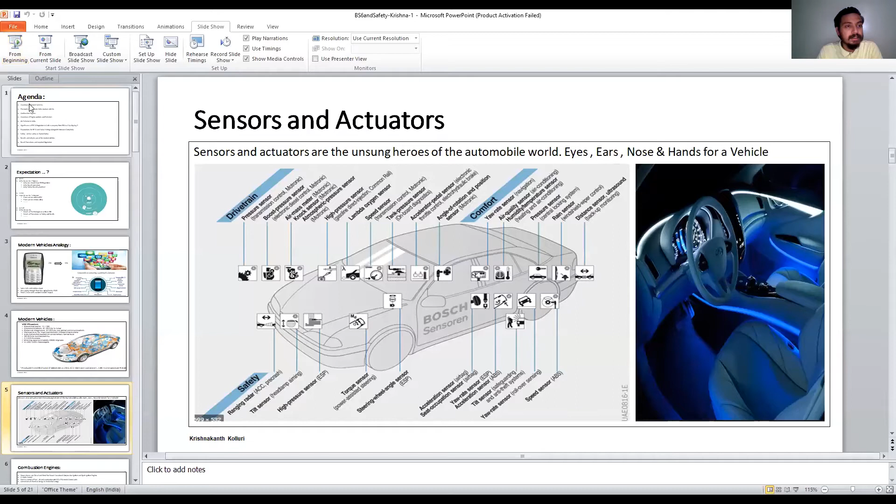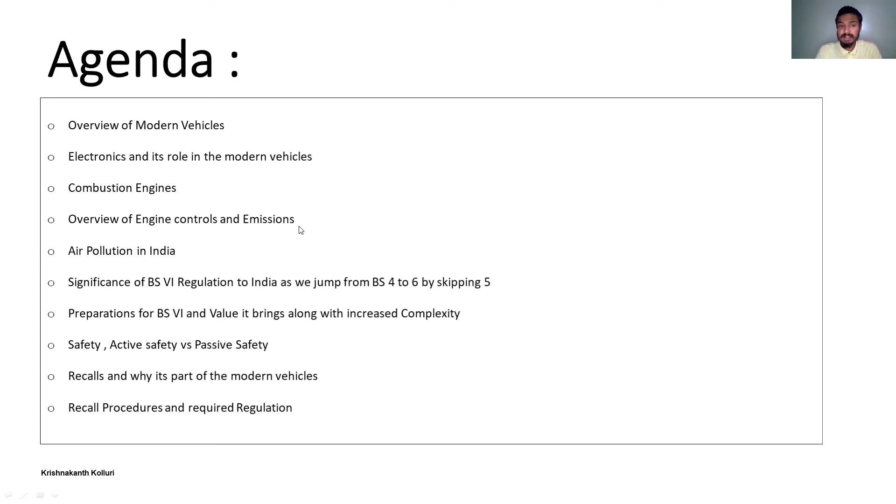Coming onwards to the overview of engine controls and emissions, we'll talk about air pollution in India - what is the stage and level of air pollution happening in India. Moving onwards, we will talk about the significance of BS6 regulations in India, as we jump from BS4 to BS6 by skipping BS5, along with the preparations needed and the increased complexity it brings. Moving onwards, safety - active safety and passive safety, the types of safety. Lastly, we'll be talking about recalls and why they are important for modern vehicles, along with procedures, technical terms, and some regulations related to it.

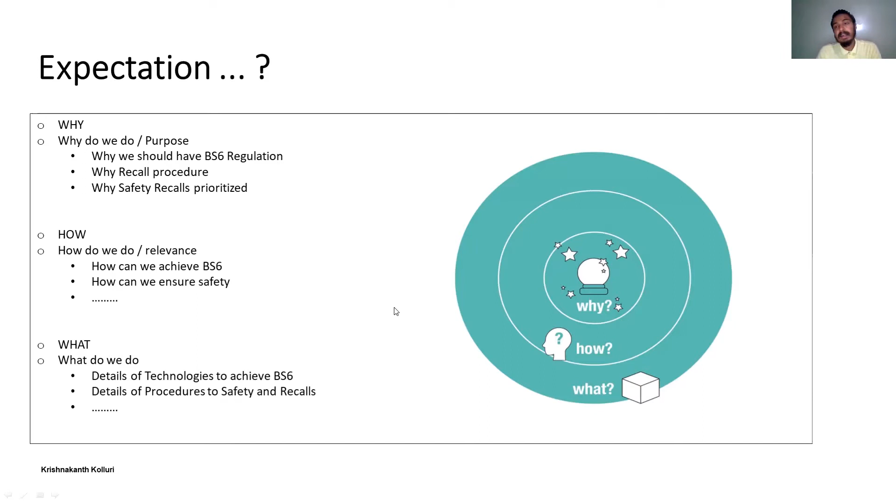So what should be your expectations from this presentation? The first thing we would learn is what BS6 regulations are, how recall procedures are done, and what safety recalls are prioritized over every component. Then we will talk about how we can achieve BS6 regulations and the things associated with it, and how we can ensure safety in BS6. Lastly, we will discuss how these technologies are affecting things and how BS6 can achieve what we want, along with details of the procedures of safety and recalls.

But it is not the same in the case of vehicle modifications, as it includes a lot of parts and a number of hardware upgrades, and it is not easy to have a vehicle recall. It's a very complex procedure.

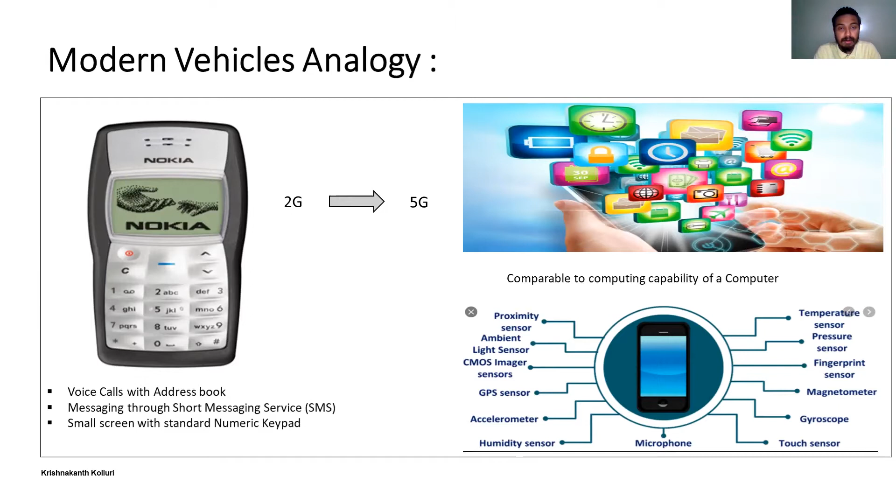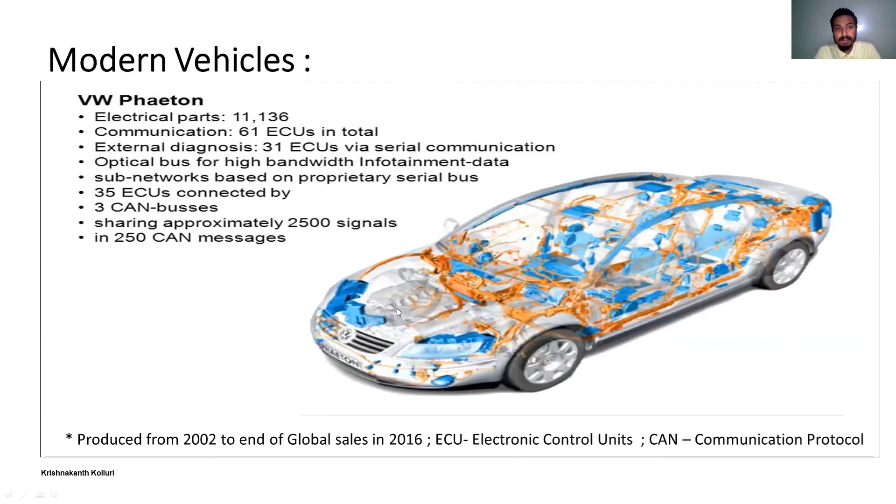So here you can see the detailed procedure of it, how each and every component is valuable, and how the recall procedure is such a complex process.

So now moving onward to the sensors and actuators. These are nothing but indicators, and they are a kind of unsung heroes of the modern electronic automobile world. They work as the eyes, ears, nose, and hands for a vehicle. Each and every part has sensors and actuators associated with it, indicating different types of functions and indications to the driver.

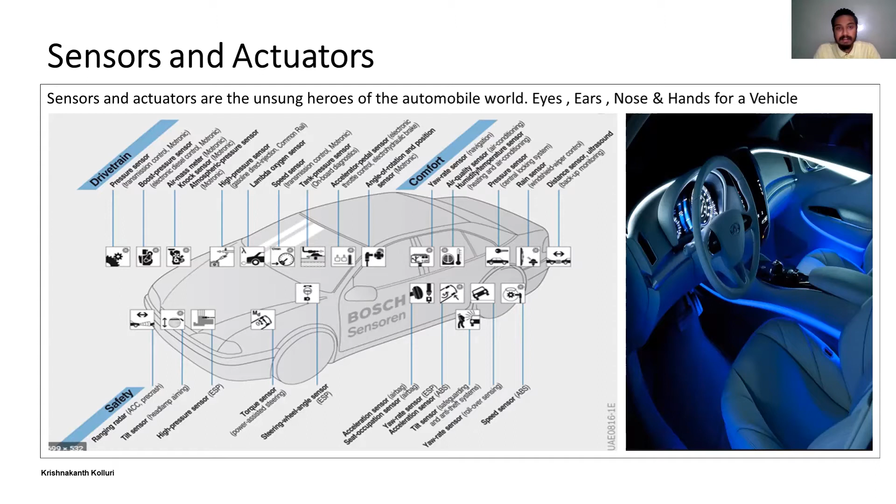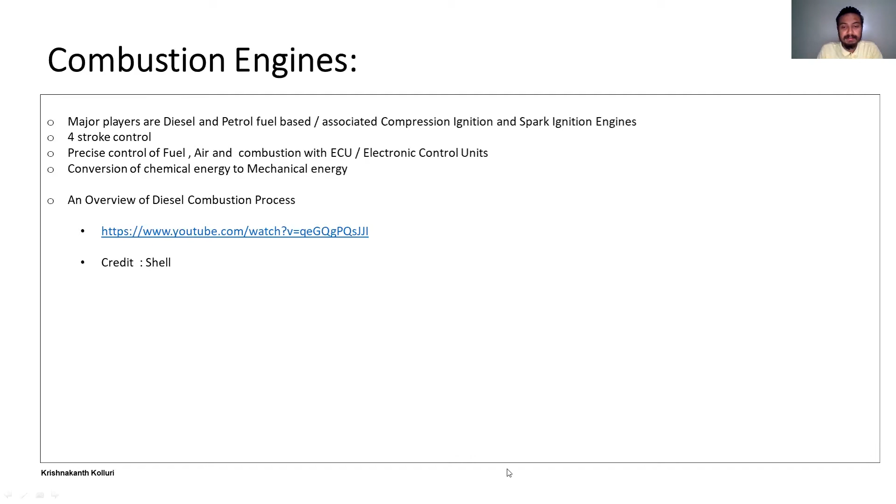Before I jump into the emissions part, I just wanted to look at a very small 2-minute clip explaining how combustion happens in a diesel engine.

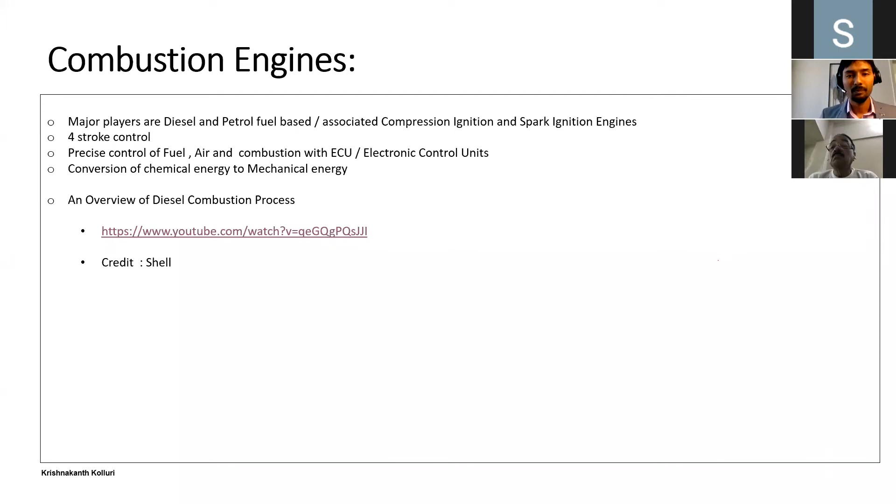I hope everybody can listen. I have tested it, but please let me know. Otherwise, there are subtitles for this.

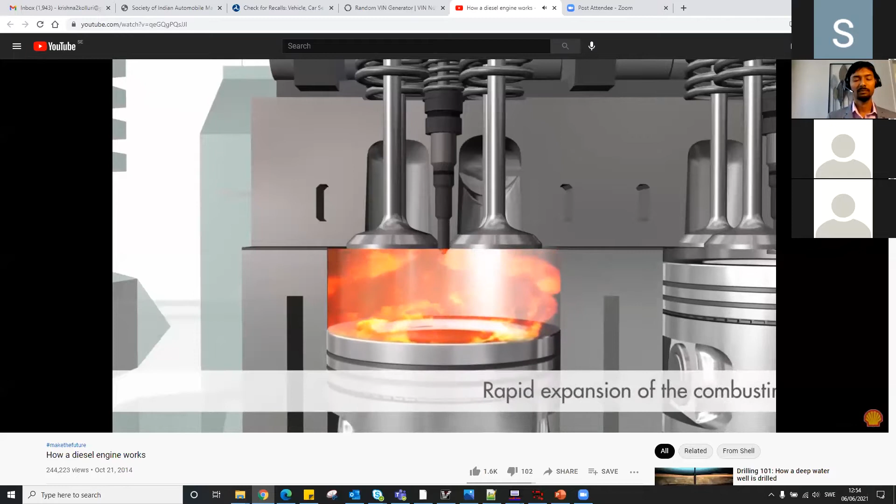Krishna, we are not able to listen to the audio. You are probably not able to listen. Okay, you can explain while the video is going, I think. There is a small issue. Are you able to hear now?

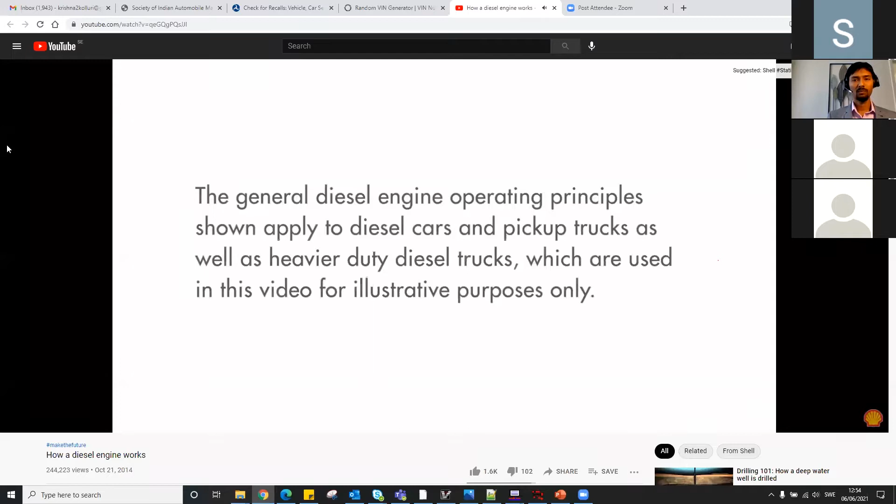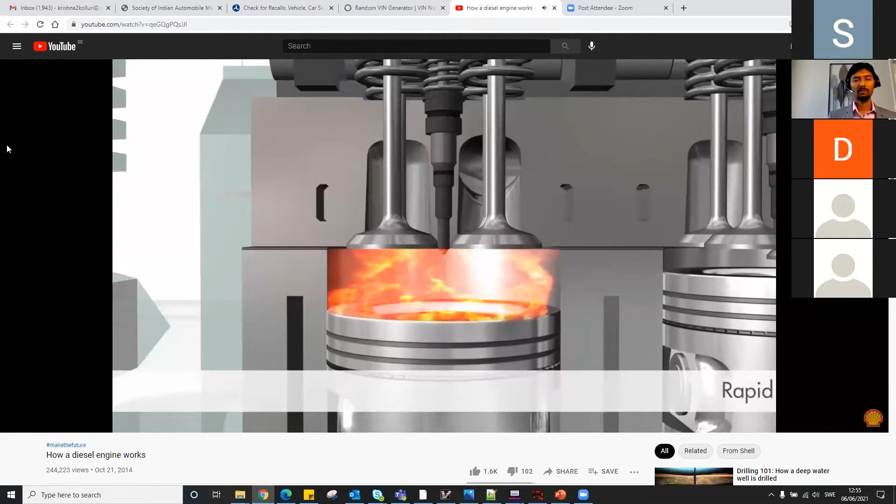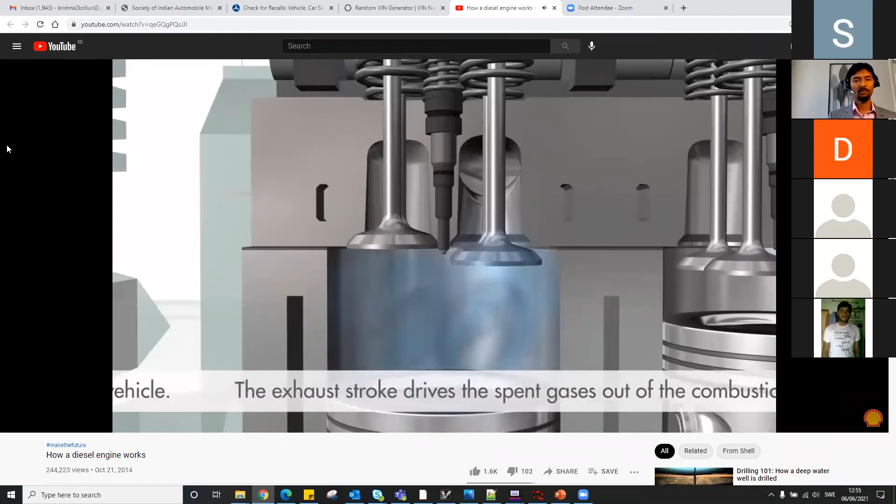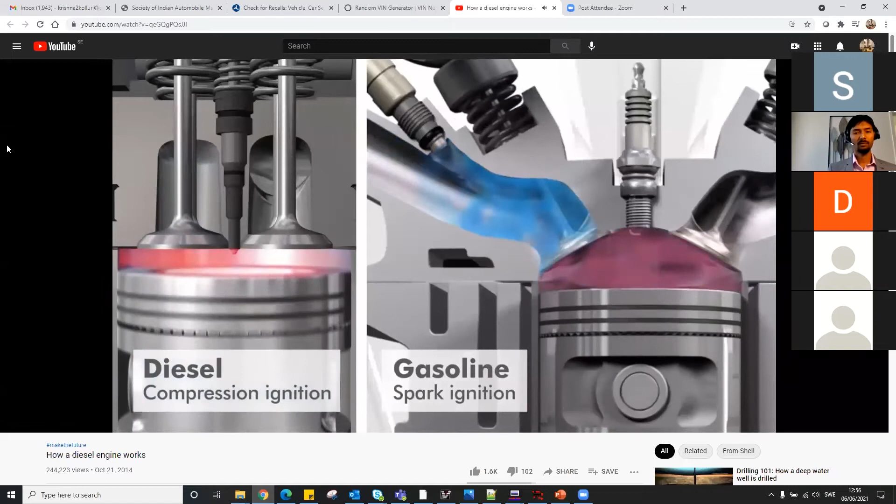Diesel engine operating principle. The general diesel engine operating principles shown apply to diesel cars and pickup trucks as well as heavier duty diesel trucks, which are used in this video for illustrative purposes only. In diesel engines, the operating cycle starts with clean air being drawn into the cylinder, not a fuel-air mixture as in a conventional gasoline engine. The motion of the piston compresses the air, heating it to a high temperature. When the piston nears the top of the cylinder, fuel is injected under high pressure through a number of precisely machined holes in the tip of the fuel injector. The fuel enters the engine in the form of a fine spray, and the surface of each droplet quickly begins to vaporize on its path through the hot air. Spontaneous ignition takes place without the need for a spark, and rapid expansion of the combusting mixture increases the pressure in the cylinder, forcing the piston down and powering the vehicle. When the piston is close to its lowest position, the exhaust valve starts to open, and the exhaust stroke then drives the spent gases out of the combustion chamber, and the cycle starts again. In conventional gasoline engines, a mixture of fuel and air is drawn into the cylinder, compressed by the motion of the piston, and ignited by a spark as the piston nears the top of the cylinder. The resulting combustion generates pressure which forces the piston down to power the vehicle.

So I guess that gives an introduction to how the basic diesel engine works. I don't want to go through the technical details because it's not our topic, but I just wanted people to understand why emissions are part of engines, because it's basically combustion. When something is burnt, you have certain pollutants. But in the case of engines, it is completely different.

We have a lot of hydrocarbons and NOx related emissions and so on. That is because, as you are seeing in the video, the combustion properties are completely different than what you are doing in a normal environment. That means if you just fire something outside, you just have some smoke and some things, but combustion inside the cylinder is completely different. The pressure is different, the temperature is different, and everything is different.

So there is a chance of forming new types of pollutants, which must be treated before we let it out. For example, with BS6, the atmospheric pressure is 1 bar, but when you actually send the fuel inside the combustion chamber, most of the time when a common rail is used it's at least 1800 to 2000 bar plus. That means the fuel is compressed 2000 times, and it's one of the very safety critical components, because with that enormous pressure, the fuel properties and everything change. So that's why combustion inside the chamber produces a lot of different pollutants compared to what you'd get outside in normal environmental conditions.

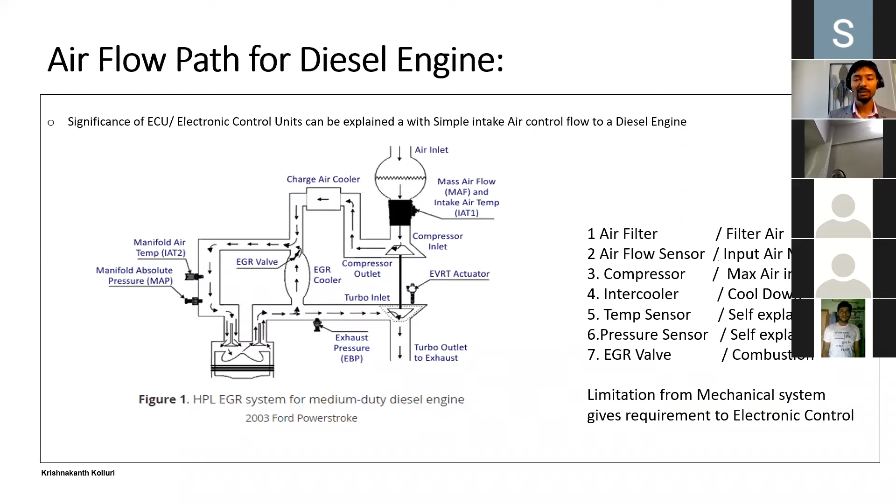So now let's jump into the emission part. Whenever we are burning fuel in the combustion chamber, as I said before, the temperature conditions, pressure conditions, stoichiometric ratios and so on are completely different from normal. That's why we produce a lot of NOx, hydrocarbons, carbon monoxide, and so on. So with the new BS Stage 6, there are regulations that tell you to treat all this before letting it into the environment.

Let's take an example here, the DPF, which is a diesel particulate filter. In BS Stage 4, there is no regulation to treat it - that means whatever is combusted is thrown out into the atmosphere through a tailpipe. In later slides, we'll talk about how just one particle can create a lot of harmful effects on health.

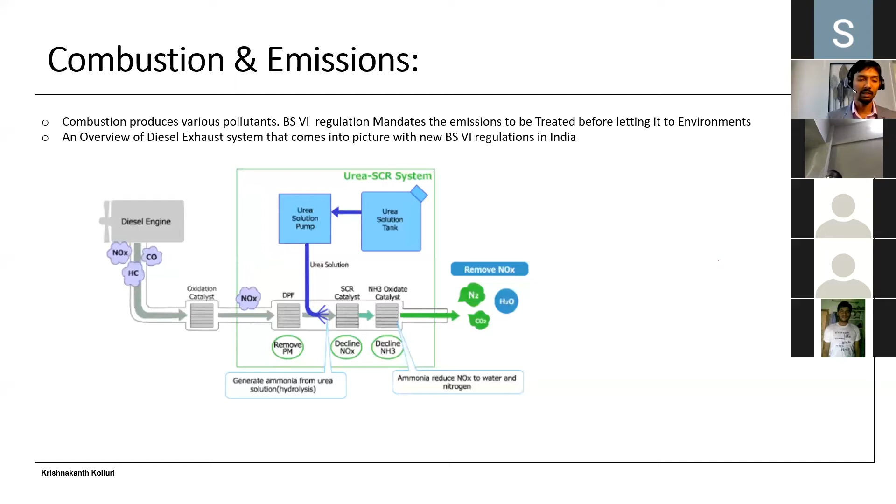You could see on the right side basically how combustion produces different types of harmful chemicals or gases. I personally view this as also part of safety, but it's not classified as safety because safety is immediate. These are like a kind of slow poison coming from our vehicles into the atmosphere, influencing our health and causing a lot of harmful effects on our bodies. So we'll go a little bit deeper into it.

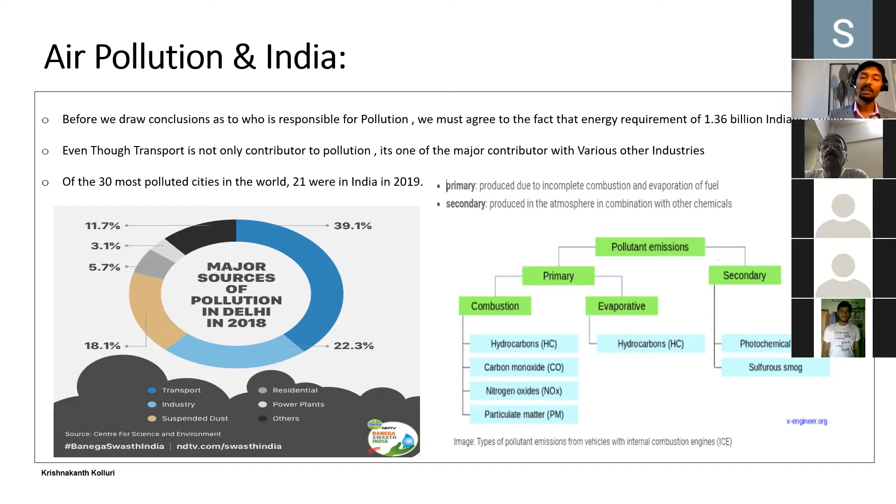What is Bharat Stage 6? Basically, Bharat Stage 6 says that if you have a combustion engine, be it diesel or gasoline, combusting any kind of fuel, there are regulations on what is the acceptable level of these pollutants into the atmosphere.

As I said before, in Bharat Stage 4 there is no exhaust treatment. Whatever is combusted, you just have a normal catalyst oxidating it and then you send everything out. But now with the new one, we have a lot of treatment happening, and that means we are eliminating most of it. If you take a DPF, most current regulations state you should have a latest DPF, and the efficiency depending on operation is at least 90 to 99%. That means you can imagine how much of it is now gone with the new regulations.

And then some technical details about type approval. That means we are measuring it real time, and OBD is basically onboard monitoring of what is the fault, so nobody needs to bother about it physically. The software tells us what is the problem in this vehicle. And then we have fuel infrastructure that needs to be updated. There's a lot of chemistry happening in the exhaust system to treat these harmful chemicals into normal ones, like H2O is just water and nitrogen is part of the normal environment.

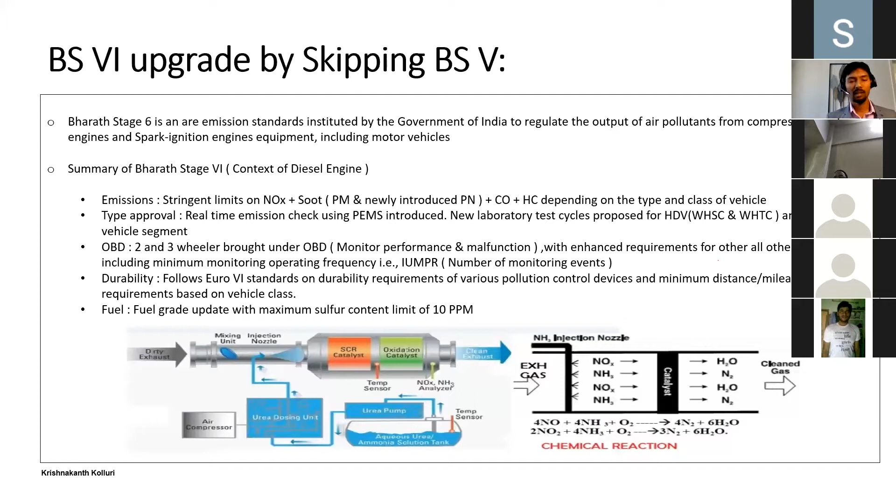So we are treating most of these combustions now with the new norms, and that means we are actually inhaling safer and safer air. Just to take one example, this is one of the diesel particulate filters that comes as a standard part of installation with the new Bharat Stage 6.

But if you look at this particle, what is it? It's just that you have a combustion, and somewhere you have incomplete combustion due to a lot of practical reasons, and then these particles are produced.

The important thing is these particles are so narrow, on the order of 10 micrometers, 2.5 micrometers, and 0.1 micrometers depending on classification, that your natural human body cannot really filter it with your lungs or whatsoever. So it can directly enter your bloodstream when you inhale it. It cannot directly cause death, but it actually amplifies the process.

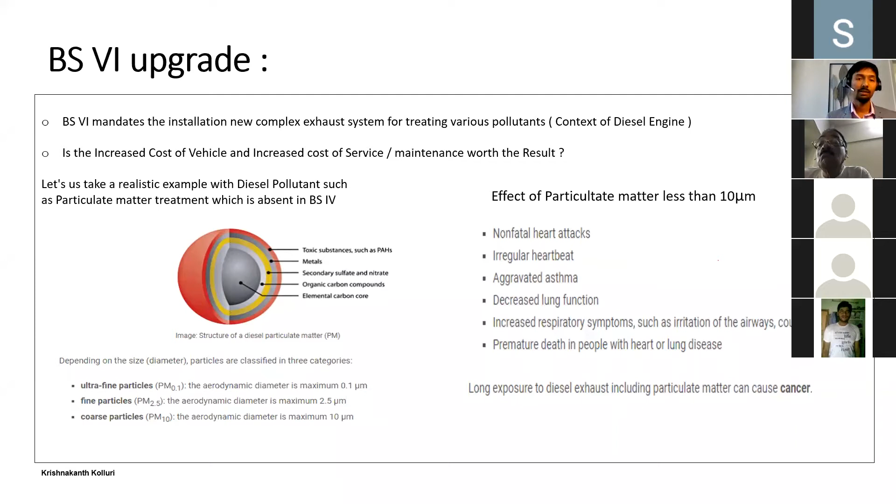It's a sad reality that if you're actually in some of the most polluted cities, spending a day there is almost equal to smoking 8 to 10 cigarettes. These particles, when released directly into air, can just directly enter your body when you inhale it, because it's so small that nothing in your body can actually filter it. It can even cause cancer.

So you will not really relate to the size, let's have a real analogy here. If you take a human hair, it is at least 50 to 70 micrometers. And if you take fine sand on a beach, it's up to 90 micrometers. But the particles we are talking about here are about 2.5 and 10 micrometers. So now you know how small they are, and they are produced only because of these combustions.

As I spoke before, the new DPF, which is part of these new emission norms, can almost reduce it. So if somebody in the campaign field, part of this IRS, says okay, we have new norms and the cost of the vehicle has increased so much and the maintenance has increased like 20%, you should clearly tell them what is the benefit. I would say it's absolutely beneficial because these emissions create a lot of problems. Even though they're not directly part of safety, they can cause a lot of health issues. And the only way we can avoid them is to treat them before you leave it into the atmosphere.

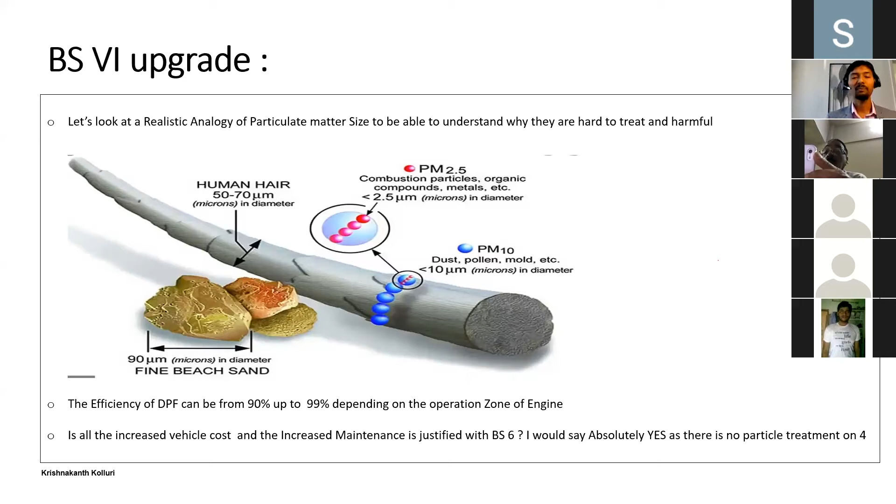So let's come back to the original concept of safety. OEM stands for original equipment manufacturer, meaning Volvo, Ashok Leyland, Mahindra, Tata - all these come as OEMs. Broadly, even though there are multiple categories, we call it active safety and passive safety systems.

Active safety, as others in previous presentations have told, will prevent the accident from happening. For example, an anti-lock braking system - just like an engine system, it has its own set of electronics that senses information and actuators that work based on the need. What does ABS give you? If you do hard braking, it still lets the user maneuver. That means even if you press your brake 100% in a panic, you'll still be able to control the drivability of your vehicle.

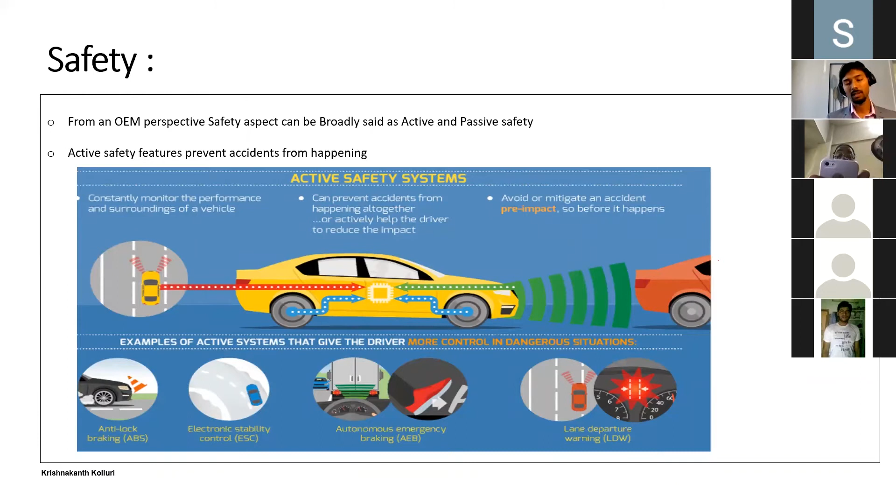These technologies help us avoid the accident. That means if there is a vehicle nearby and the driver, for some reason, is not activating the brake, the car can detect it and actually brake itself to a safe distance. These things help avoid accidents, but since a lot of examples have already been given in previous sessions, I won't go into the technical details too much.

But then there's another type of safety - passive safety. The previous one tries to avoid the accident, but if the accident becomes inevitable, these systems help us save lives. Typical examples are seat belts, child safety seats, airbags, and so on. This also has its own set of sensors, actuators, and an ECU that controls the whole functionality - when to activate it, the right time to activate it, and so on.

For those in the campaign field, I don't want to go too much into the details of these technologies since it's already available on the internet and has been covered in previous seminars. But I can share my own experience.

Way back in 2017, I was working in Bangalore. In the month of February, I decided to go home from office every day by cab. I met 14 different drivers in Bangalore on my way home each day, and only 12 of them were wearing seatbelts. When I personally asked them, some said they wear it because their company mandates it, or because police fine them if they don't. The sad reality is that 30% of them had no idea how the seatbelt actually helps save them.

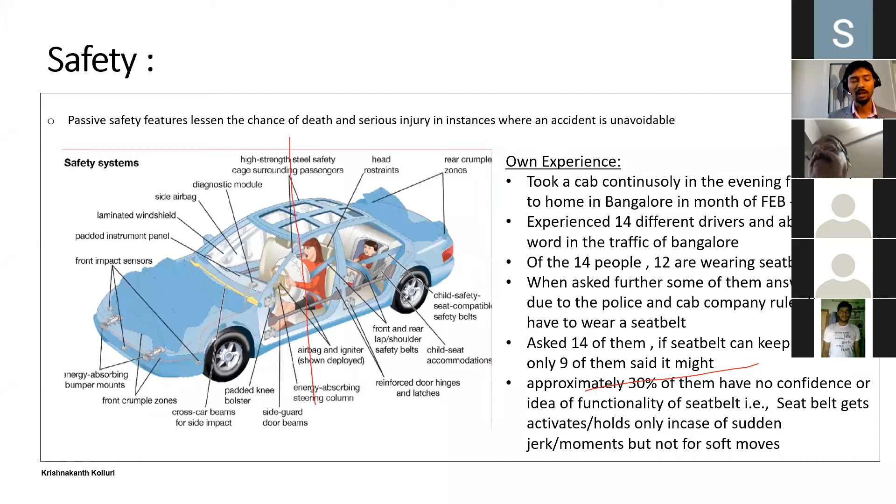Now I want to talk about another incident that happened in October 2013, when a bus was going from Bangalore to Hyderabad. This bus hit a culvert while overspeeding and was completely burnt. According to the FIR summary submitted to the government, 44 people were completely burned to death, including an infant. Only 5 people survived, and the accident happened due to overspeeding. The government of Andhra Pradesh had to do DNA sampling because the bodies were so burned, fragile, and completely unidentifiable.

So I want to ask the participants now - let's take a small break. We've talked so much about safety. Before we go into a detailed technical analysis of vehicle, chassis, roads, and so on, what do you think is the basic safety concern as a user? What would you suggest that would have actually helped? I'd like to hear from any of you.

Good evening, Krishna. Yeah, this is Vinod here.

For me, the education of drivers is a basic concern. As you said in the earlier slide, the cab drivers are not aware about seatbelts. Similarly, in India, ABS is compulsory in BS6 vehicles, but in maybe 50% of vehicles, ABS is not working, and drivers don't know how to check the ABS brake, how it functions, or what its use is. They don't know about that. So without knowledge, having the equipment is a safety concern for me.

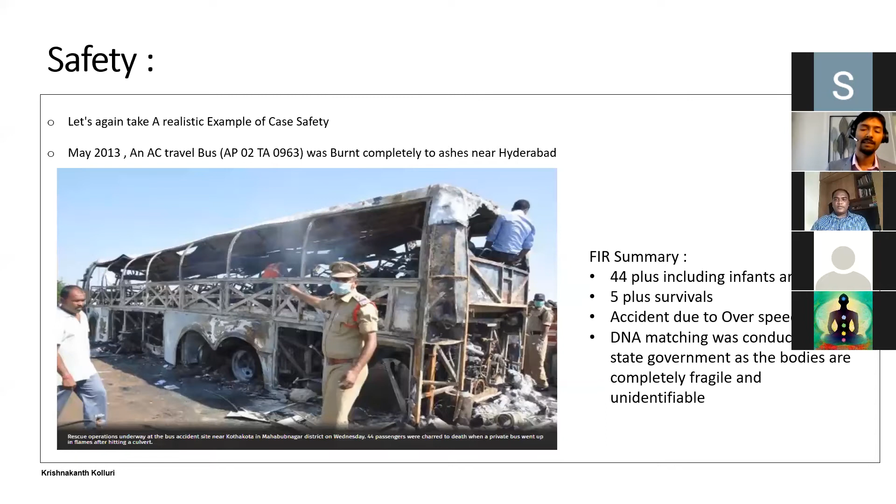Okay, I feel that if the participants or occupants were belted, possibly some of the fatalities could have been avoided. So let's look at the reality now.

Most of the time, we think of very high technical engineering when it comes to safety. But in reality, most of the time, just being aware of basic safety precautions helps a lot. And a lot is actually very big, because in this case, if this primary safety I highlighted is taken care of, there's a report that 90% of the 44 people could have escaped with just injuries.

So this is not always about a masterpiece of engineering. As Giri also pointed out regarding Sweden, when you take a driving license there, you actually apply 100% brake as part of the license test. That means you do panic braking, and you experience the ABS yourself and test the ESC, the electronic stability program. It's always the experience that connects you to the safety part.

So in this case of primary safety, one basic thing is that all these new multi-axle air-conditioned buses are supposed to have glass breakers across the seats. That means in case of emergency, they should be provisioned to break the glass and jump out of the vehicle. This was not followed, and it's been made mandatory only after this incident in the state of Andhra Pradesh. It was also found that the emergency exit had a few extra seats. Just to accommodate a few extra seats, they covered the emergency exit, and there was no proper marking on it.

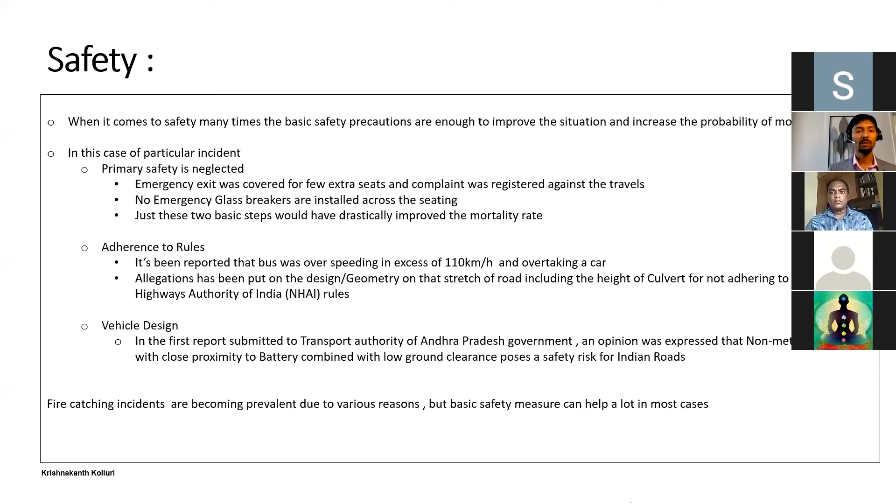So now let's jump into our main topic, that is recall.

What is a recall? Basically, recall is calling back the vehicle because it is not in accordance with what is committed either to the government or to the customers, which has already been delivered. That means you have already sold a vehicle, but unfortunately it develops a problem after 500 hours of use or 10,000 hours of traveling, due to different safety or non-safety aspects. So that we call a recall.

Now most of the audience has a rough idea that each system, like engine or airbags, has a lot of sensors and so on. Recall is very common because with 20,000 electronics, it's quite possible that some might not behave as intended after a certain amount of time, due to some reasons, a combination, or practicality. So recalls are inevitable in modern vehicles, and this is for the whole world.

But how we handle it is what actually defines safety for us. With the new BS6, all the OEMs are updating this line of vehicles. They're coming with more safety features, comfort features, and so on. That means we now have a new set of much more complex vehicles being released to the road compared to a decade ago. Naturally, the recall rate or probability percentage is high.

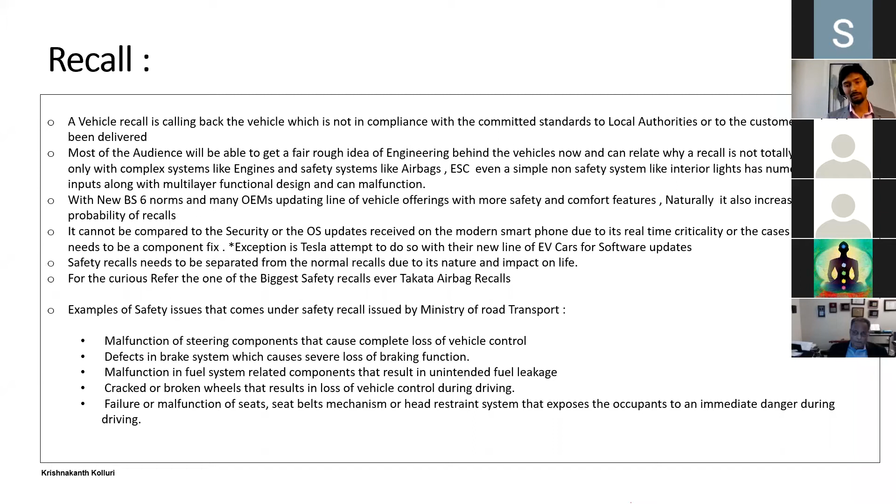So currently, how are we doing recalls, or at least what has been outlined by the government of India, is that the SIAM, the Society of Indian Automobile Manufacturers, deals with these recalls. In the next slide, we will see how in reality the website works, taking a practical example of one car and what type of information we have with respect to recall.

So the government defines the recall procedure like this: an OEM, like Volvo, Tata, or Mahindra, or some supplier to this company, identifies a safety risk. The first thing they will do is a risk assessment based on the failure, severity, controllability, and so on, and conclude whether it's a safety defect or not. This is completely under the responsibility of the OEM as of now.

There is a nodal agency nominated by the central government, which takes feedback from us consumers who are purchasing the cars, and then coordinates with these OEMs. So it's up to the manufacturer to first identify, then create a process to evaluate and confirm the defect. Once confirmed as a defect, they have to go through the standard recall procedure: inform the dealer network, inform the customers, create a timeline, estimate for the government the number of products included in this recall, and maintain this record for 7 years.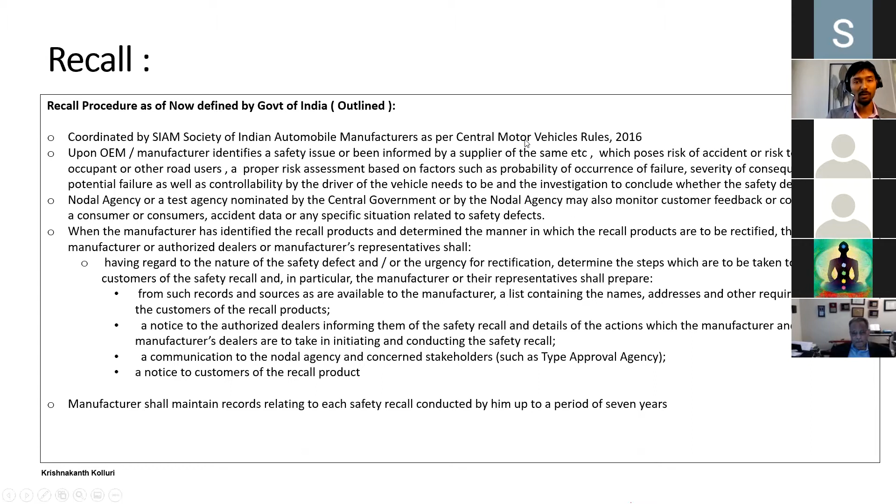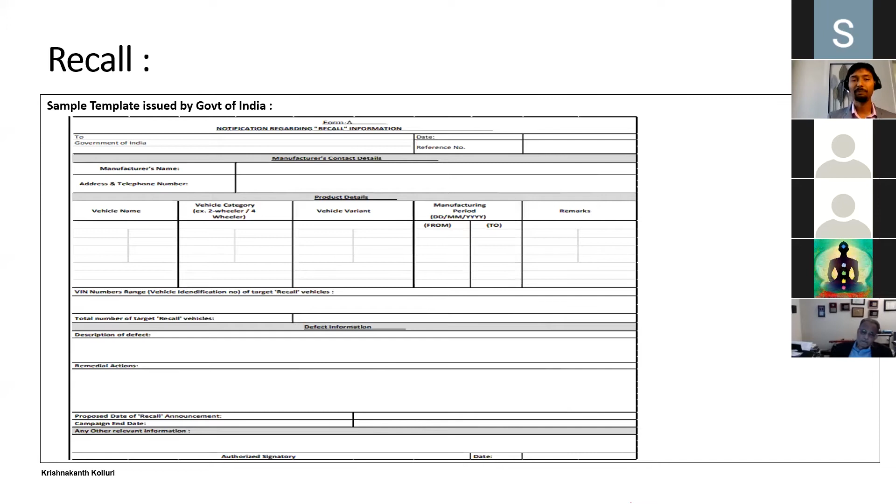This has been mandated with the new law. This is the template given by the government of India for OEMs when there is a recall. As you can see, it's just the manufacturer, chassis, vehicle, the problem, total vehicles recalled, what action has been taken, when they plan to announce the campaign, when they plan to finish it, and any other information. So this is what the process currently is.

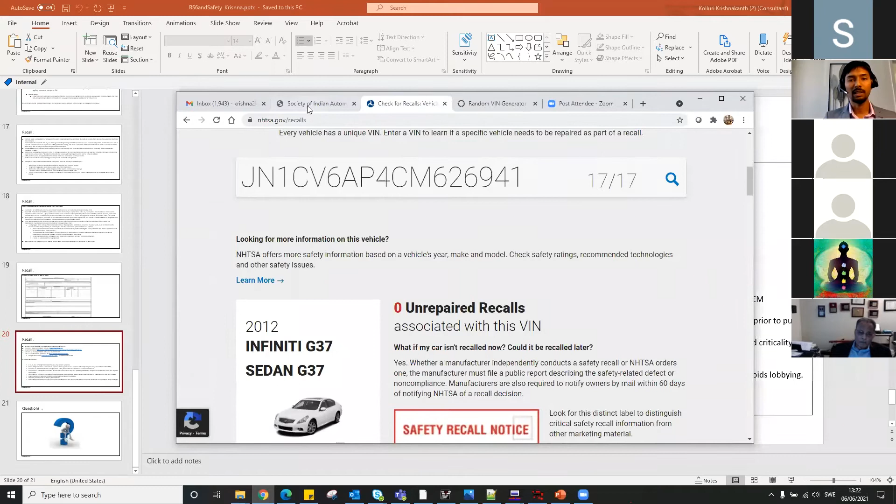But let's look at the reality. Now I'll go to the SIAM website and see how it is with respect to this information. I hope everybody can see my screen now. Yes, you can see. So as I told, currently it is happening voluntarily by SIAM.

That means this automotive union is actually handling these recalls, and we don't have a real difference between a safety recall and a normal recall. Let's take one car, BMW, and check the year. We don't need to really enter the model or variant, we can see.

So if you see here, you can see 10th September 2019, a model and a variant, total number of recalls targeted, which are manufactured, and what is the error. So this is only for information.

If you are actually a consumer of a vehicle, your first point of contact is always your dealer. But having this transparency helps a lot, because if I have taken a car that's been used, or I am at a certain place where I'm not accessible to the dealer, I can have this information open if I have an issue with it.

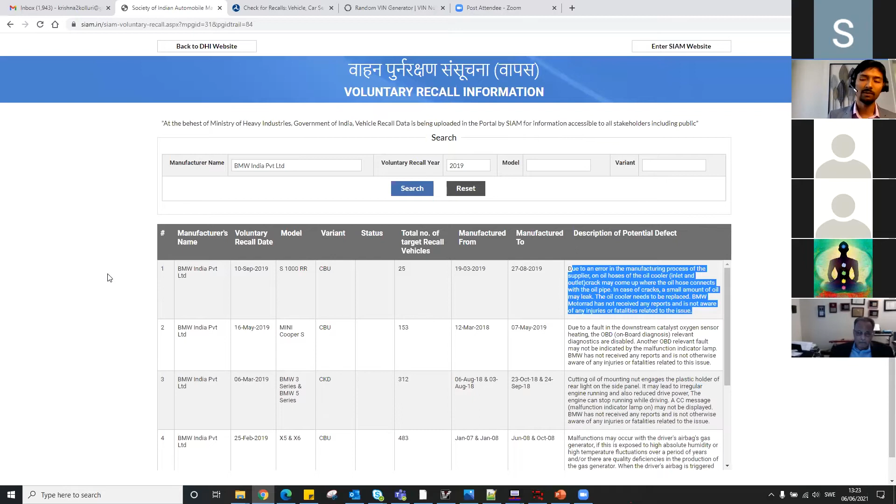But the sad part is we don't have a separate safety category. That means I have to go through a lot of information that is associated with this. And if you look at one of the advanced countries like the US, let's see how it is.

This is NHTSA, the United States Department of Transportation. What they do for recall is they have a unique vehicle identification number. Of course we also have it - it doesn't mean it's specific to the US, but the current system in India hasn't really implemented yet a database based on the vehicle identification number.

So we can just check this particular chassis here, or the vehicle identification number. Okay, it asks me something.

So if you take the US, it's quite simple actually. You just take one particular vehicle identification number. The VIN in terms of relevance is just like an Aadhaar to us - each vehicle has a unique identification number, and you can just enter it and know if there are any recalls. You don't need to go through all the hassle we currently have. Even if you are just a consumer who doesn't have any idea of automotive, it is quite useful because you just enter your vehicle number and find out there are no recalls applicable for you. Now let's take one example where there are recalls.

See, if I enter this, I just have 3 unrepaired recalls. So what I would actually expect as an improvement to what we currently have is this set of guidelines that I would be really happy to see.

What I mean is a single shot of safety information to the consumer is always beneficial. That means if I, as a consumer, have bought a BS6 vehicle or any of the latest vehicles, at any point of time, of course the dealer is the first contact. But if I have a central site, I can just enter and know yes or no, that's it. I don't really need to go through all this information, because not all people will be capable of handling such information. So that would be really good.

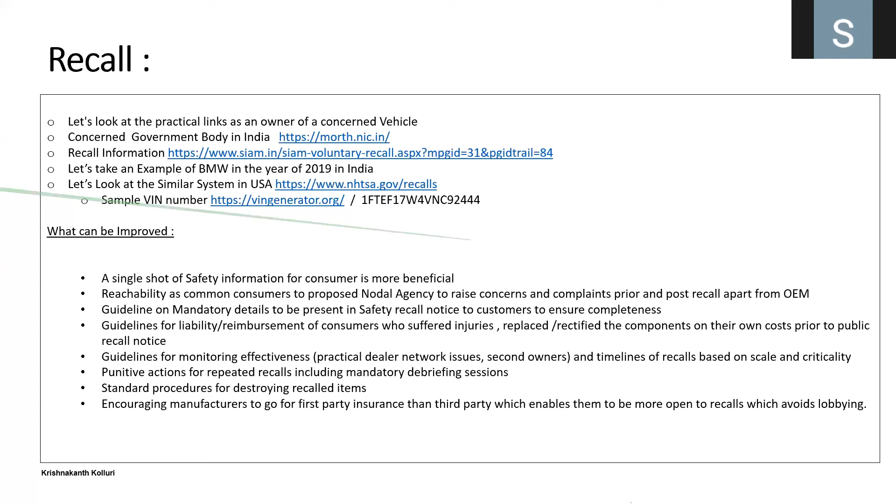And then the reachability of this nodal agency is presently a bit unclear, so we don't really know how the normal consumer can complain. Probably it will be a little better if it's more accessible. At the moment, the government hasn't really mentioned the mandatory details that need to be sent to the customers, because it's completely under the responsibility of the OEM - that means the company decides what is what. And also, once a recall is done, I didn't find anything that will ensure its completeness or effectiveness.

That's not because we don't trust our own OEM, but it always brings more accountability, more transparency, where we can achieve more results. And if an OEM is performing more and more safety recalls, there should be some actions that I would like to see, which I think would help the overall safety.

Also, it is good if the government suggests they go for first party insurance rather than third party for handling this whole amount of money, because recall is a big process. You have to inform the dealer network and all the users must be brought back to the station. If it's a software issue, it's a software fix. And if it's a component, like some particular part, they need to fix the new part, make sure everything works, and then send it back. All this has to happen free of cost.

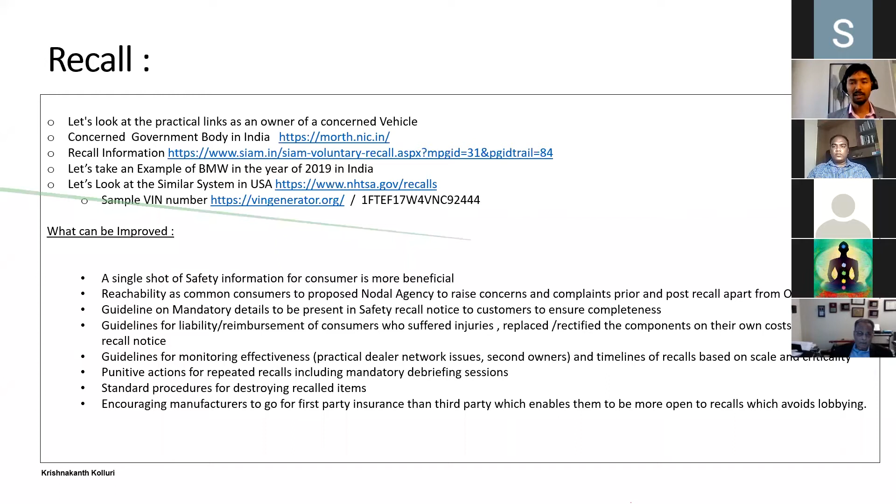I think now most users have an idea how Bharat Stage 6 or complex systems are helping in terms of safety, what we as users should know or concentrate on, what the process for recall is, and what the government is doing and what could be better. With this, I will conclude my presentation, and it would be really nice to discuss some questions.

Okay, perfect, thank you Krishna. It was really a very good overview about the recall, and in fact I really understood how the engine works. It was like my master's sessions again, sitting and looking at the engine, how the exhaust works and what the emissions are and stuff like that. I also saw a lot of comments coming in that even non-technical people understood the presentation much better. So that's really great, thank you.